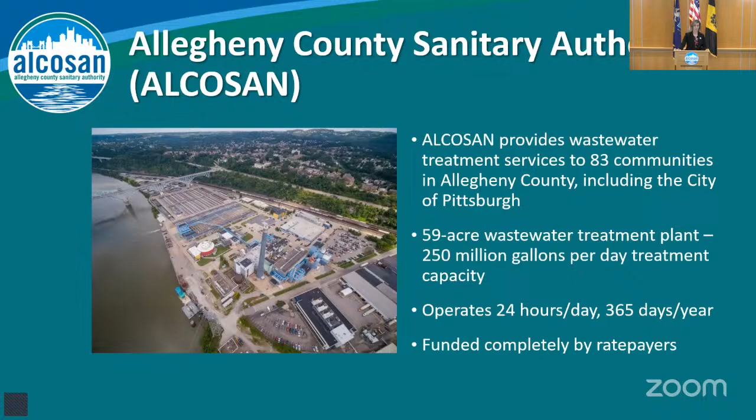This work has been at the heart of Allegheny County Sanitary Authority for more than 65 years, and we operate 365 days a year.

Tonight we will talk to you about ALCOSAN's Clean Water Plan. In front of you, you will see facts about the plan, and for the sake of time, I'm not going to dive into those facts. We have a plethora of information on our website where you will be able to find the development of this plan and its status. These are the components of the Clean Water Plan, and tonight you will hear our speakers talk about the various pillars of this plan.

But most importantly, we have 3 proposed changes to the consent decree. The first change you will hear about is an update for combined sewer overflows and sanitary sewer overflows in our service area, and that will be presented by Julia Spicher when she speaks about regionalization. The second update will be a wet weather redundant primary sedimentation tank, elimination of that, and that will be presented by Jeff Argyros when he speaks about the plant expansion. The third proposed revision will be about sampling and reporting requirements for bacteria monitoring in our rivers, and that'll be me. I will come back up and share with you that proposed change.

This meeting is an opportunity for you to be an informed participant and ask questions. Ask questions today using the chat function, or we also will have a 30-day comment period after today that you'll be able to submit a comment through our website, and we will respond to your question as well.

Before I turn this over to Tim Prevost for GROW, I want to remind everybody the reason why we're doing the Clean Water Plan. The Clean Water Plan goals are to reduce sewage overflows into our rivers and streams that directly relate to improving the quality of Allegheny County's waterways, which includes boat launches that provide access points to our rivers. These connect our communities with trails along our rivers, and also provide for public gathering and educational programs that engage the next generation and encourage waterfront development.

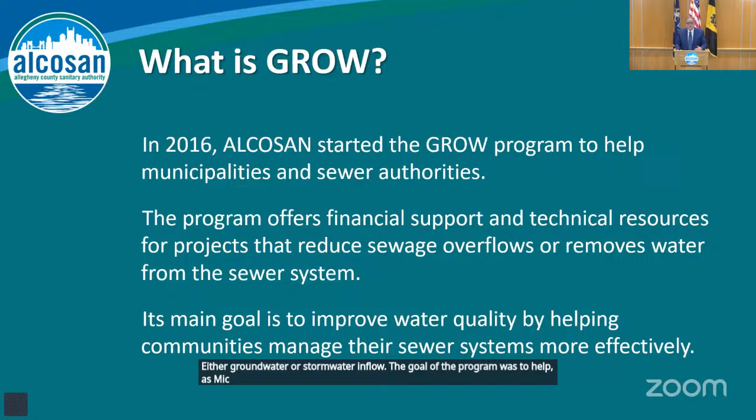I'd like to start by giving a quick overview of what the GROW program is. In 2016, ALCOSAN started the GROW program as a way to provide financial assistance to our customer municipalities to reduce the amount of water getting into the system, either groundwater or stormwater inflow. The goal of the program was to help, as Michelle pointed out, improve the water quality in our waterways. The GROW program is a grant program, and the range of funding we provide, 15% to 85%, is dependent upon how cost effective we believe the project is going to be. To understand that, each project must monitor the conditions before the project and then after the project is over for us to get an understanding of the performance that the project has.

There is a 20-year operation and maintenance obligation that the municipality takes on if they accept a GROW award.

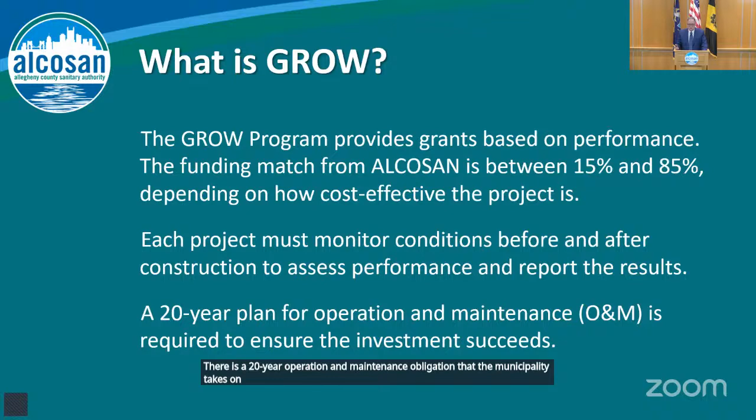Back in 2016, we released cycle 1, and in that first cycle, 42% of our customer municipalities participated in the program, and of those 42%, 24% received an award. Last September, we awarded cycle 9, and as of cycle 9, 88%, 8 of 9 municipalities have participated in the GROW program. 71% of those municipalities that have participated also received an award.

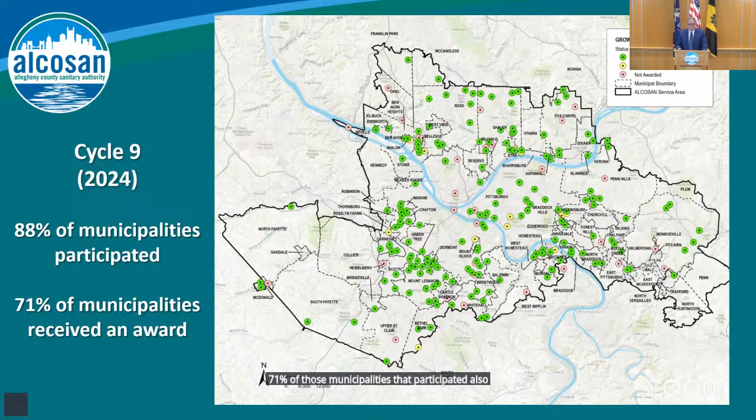As of cycle 9, ALCOSAN has awarded over $74 million to our customer municipalities for projects. Combine that with the contribution from the municipalities, we have a program that is roughly about $150 million worth of projects.

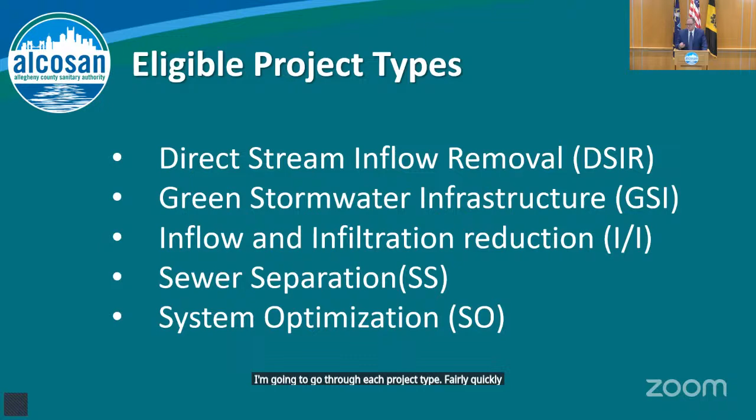Now I'm going to go through each project type fairly quickly, but I'm going to try to give a description of what the project type is and then give some statistics, because everybody loves statistics.

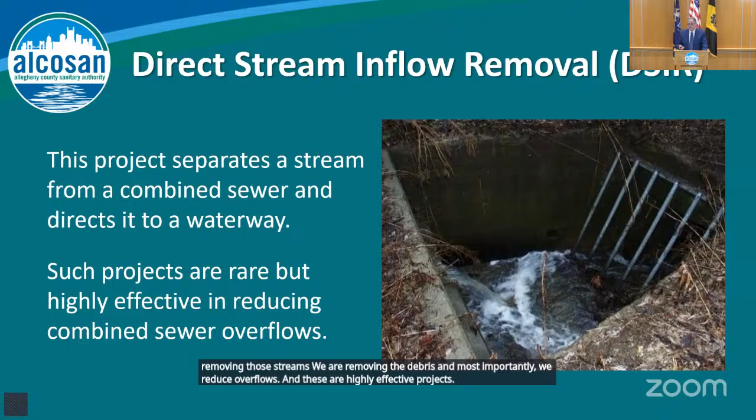This project is direct stream inflow removal. These are projects where there is a stream coming into a collection system, and when that happens, it takes up capacity, it carries debris into the sewer system, all things that we don't want. By doing a direct stream inflow project, we are removing those streams, we are removing the debris, and most importantly, we reduce overflows. And these are highly effective projects. These are rare occasions. We don't get many of these projects, but they are very effective.

We've awarded over the past 9 cycles only 3 of these projects for a little over $5 million. And when we assessed it, we thought it was about 25 million gallons of overflow reduction in a year. Post-construction monitoring, all 3 projects have been completed, and the final overflow reduction has been found to be over 40 million gallons.

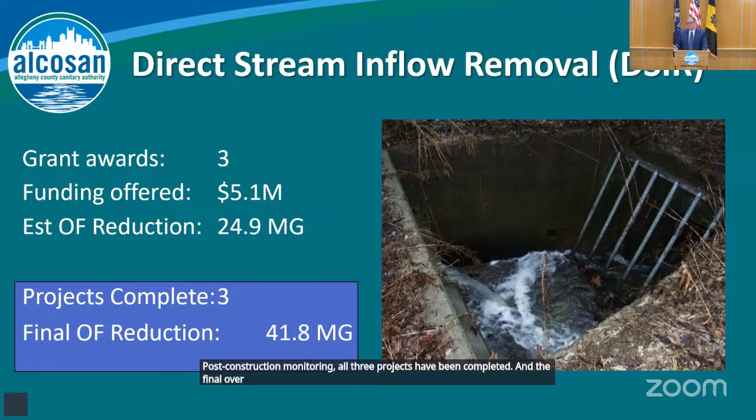Inflow infiltration removal is a project type that is very specific to one type of our sewer system, and that is separate sewer systems. ALCOSAN has 2/3 of our municipalities on separate sewer systems, so this is a very common technology. What these do is they get infiltration out of the pipes and tighten them up so we're not getting groundwater into our system. These projects require a lot of investigation that our municipalities have been doing for quite some time, so they are very confident where these projects should go.

118 projects have been awarded, $25.8 million in funding, and when we ran through these, we thought 54 million gallons of overflow reduction for those 118. Based on the monitoring of the 63 projects that have been finished, we're estimating over 60 million gallons of overflow reduction in a year.

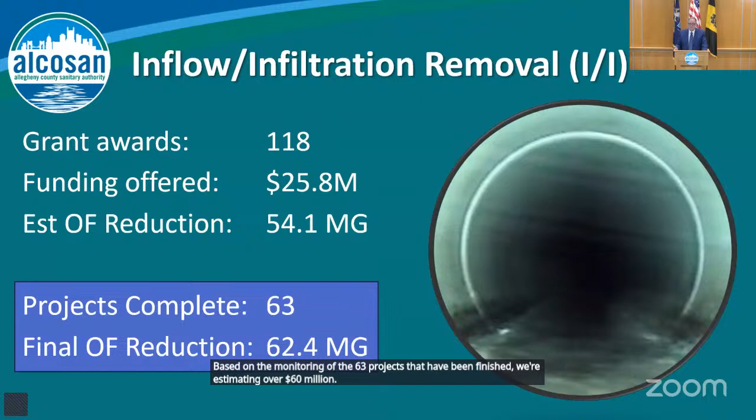Green infrastructure projects are ways to try to mimic nature and semi-natural systems to manage stormwater runoff. By managing the stormwater runoff, we're not allowing that water to get into a combined sewer system very quickly. A lot of the green infrastructure designs that were funded by GROW have been recognized nationally and regionally and have won awards.

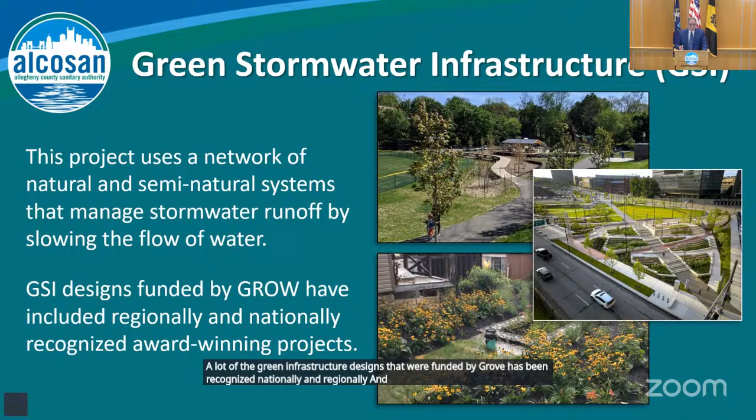We have 33 awards over the past 9 cycles, $18 million in funding, and the estimated overflow reduction of those 33 projects was about 43 million gallons. We've completed 16 of these projects, and 8.8 million gallons of overflow reduction were from those 16. I do know that there's many more projects that are coming that are almost going to get the final report, so we'll have a better update for you next year.

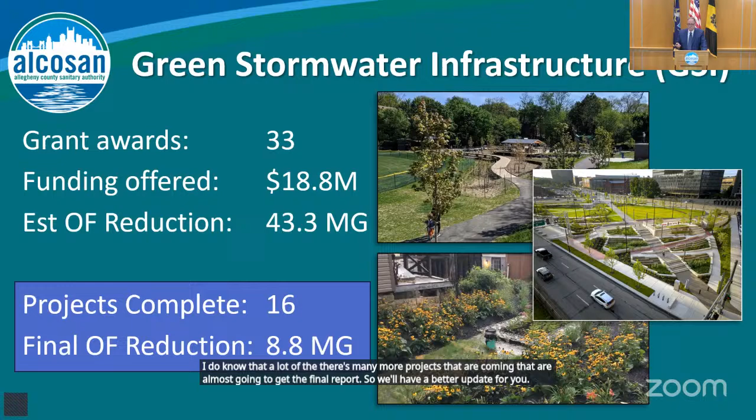Sewer separation projects are when you have a combined system and you split them up into a storm sewer and a sanitary sewer. These are very effective projects, but they're unique to combined sewer systems. These projects have an opportunity to significantly reduce combined sewer overflows.

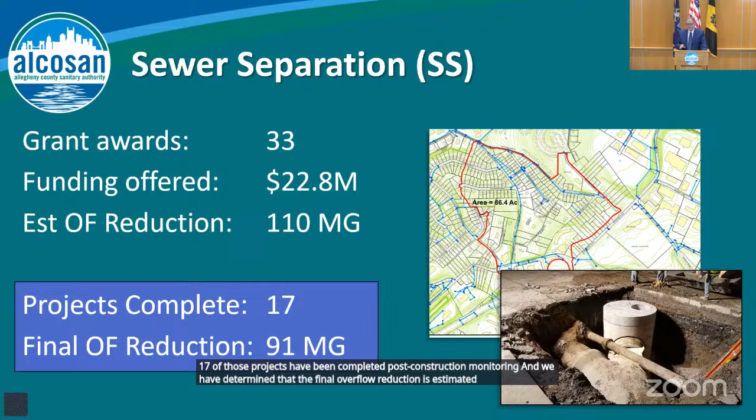We've awarded 33 projects for almost $23 million. When we estimated these projects, it was 110 million gallons. 17 of those projects have been completed post-construction monitoring, and we have determined that the final overflow reduction is estimated to be 91 million gallons. So these are very effective projects.

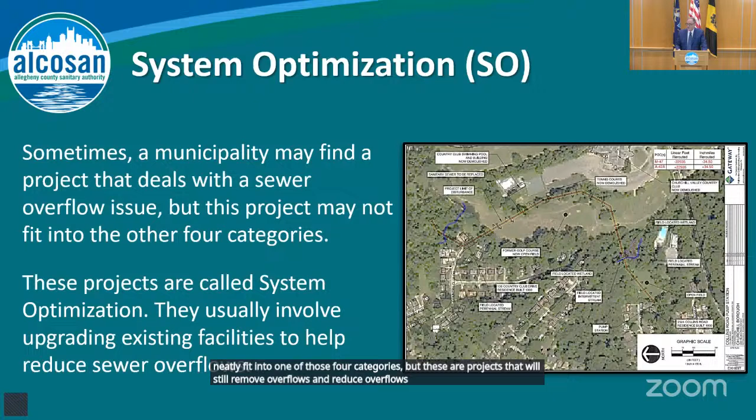And finally, system optimization. Sometimes there are projects that don't neatly fit into one of those four categories, but these are projects that will still remove and reduce overflows. So they are a category in GROW, but they're also very rare. We've awarded 3 of the projects for about $1.7 million, a little over 4 million gallons in estimated overflow reductions. 2 of those projects are complete, and we're estimating about 2.8 million gallons of overflow reduction in the year.

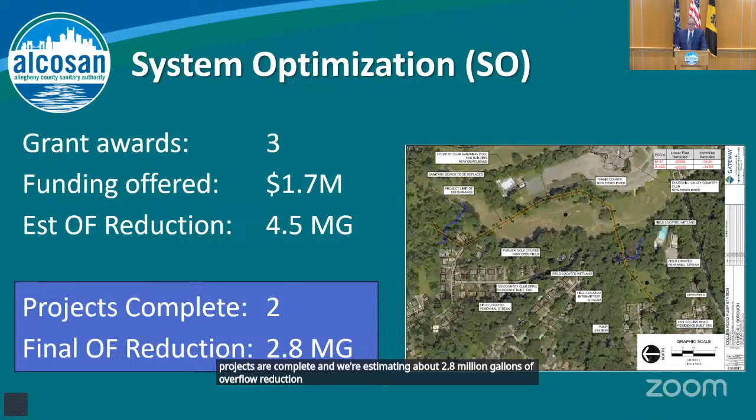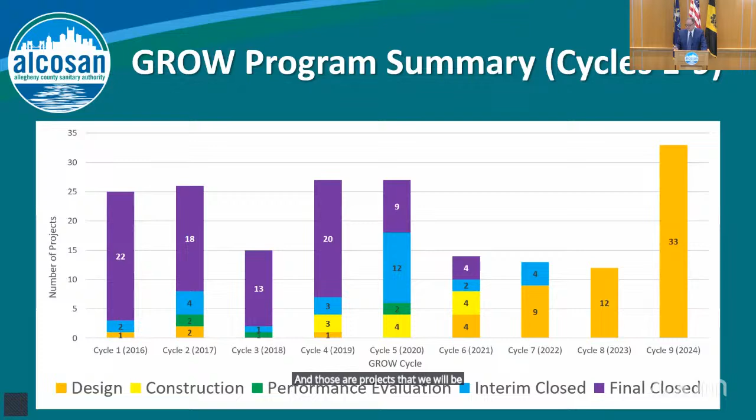This chart shows the status of the projects from cycles 1 through 9. You'll see in cycles 1 through 5, a lot of projects are final and closed. There are many projects that are finished but have maybe a final report to submit or a final payment to get—those are interim closed. On the other side, there are a lot of projects in cycle 9, 8, and 7 that are still under design, and those are projects we expect to be going into construction within a year or two.

As of today, 101 projects of the 190 are completed with a submitted final report.

After a project is done, ALCOSAN will evaluate that final report to assess how effective that project was. We compare those results from beginning to end, and we determine whether a project has been overperforming, is within what we expected, or is underperforming. Most of the projects, as this chart shows, are overperforming or meeting our expectations. Overall, the results have exceeded expectations.

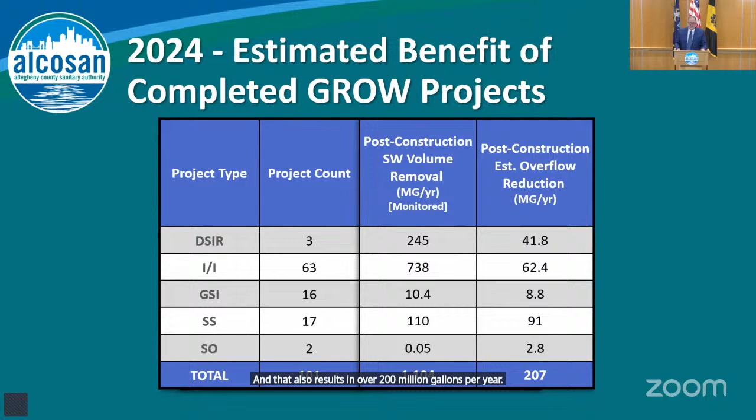And this is the results. As of 2024, for these 101 projects, we've removed over 1 billion gallons—1.1 billion gallons—of water from the system, which also results in over 200 million gallons per year of overflow reduction. When you compare that to what we thought we were going to do, 630 million gallons of water removed, or 108 million gallons of overflow removed, we're definitely seeing that a lot of these projects are exceeding our expectations.

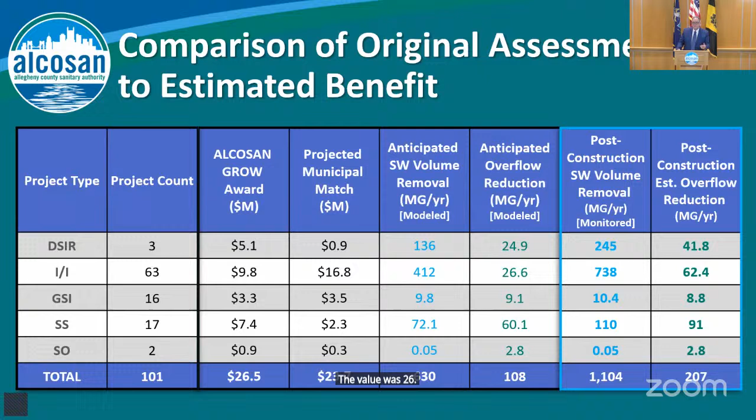And you also see that of the projects finished, the value was 26.5 million, and the municipal match was 23.7 million.

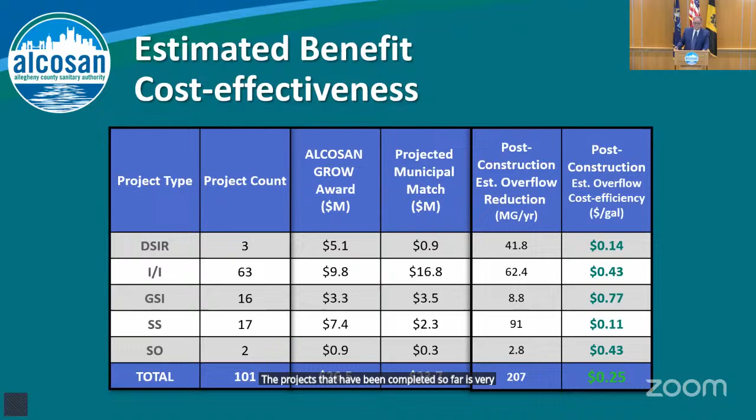And how cost effective are these? Stream inflow and sewer separation are definitely very cost effective projects, but all in all, when you put them together, the projects completed so far are very cost effective. We're estimating about 25 cents per gallon.

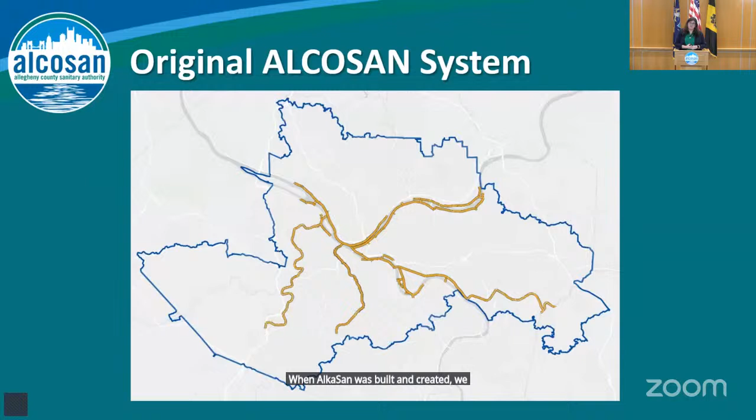So the municipalities will still continue to own their system—it's just that critical piece that's eligible for transfer. When ALCOSAN was built and created, we owned the Woods Run treatment plant, and these yellow lines you've seen on screen are our shallow cut and deep tunnel interceptors, large diameter sewers underground. They hug the rivers and extend into Chartiers Creek, Sawmill Run, and Turtle Creek.

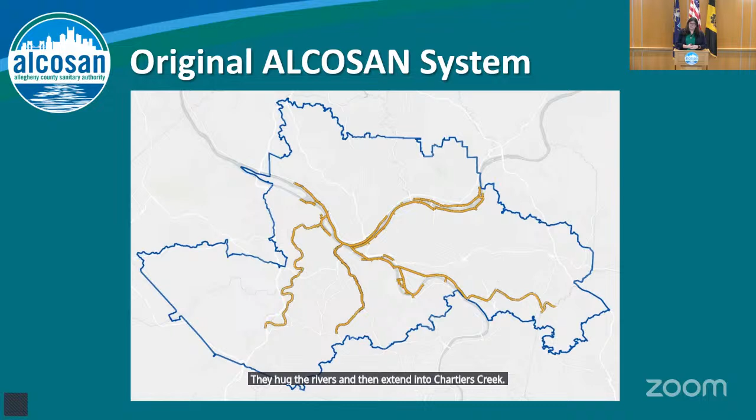Working with key stakeholders and our municipal partners, we developed criteria for what would be considered eligible for transfer, and we landed on any sewer that is 10 inches in diameter or larger and serves more than one municipality. When you apply that criteria to our system, that resulted in 265 miles being eligible to participate in the program.

Along those sewers are over 6,000 manholes and over 100 regulators, which are locations in the system where flow can either continue on for treatment or relieve itself and overflow into the water bodies during wet weather to protect public health. At those regulator structures, there are 68 combined sewer overflows and 40 sanitary sewer overflows currently owned by the municipalities and their responsibility to abate or control. There are also 4 pump station facilities and 4 equalization basins.

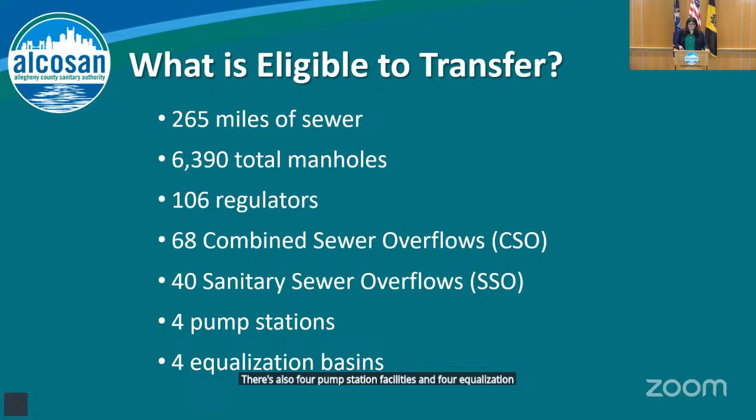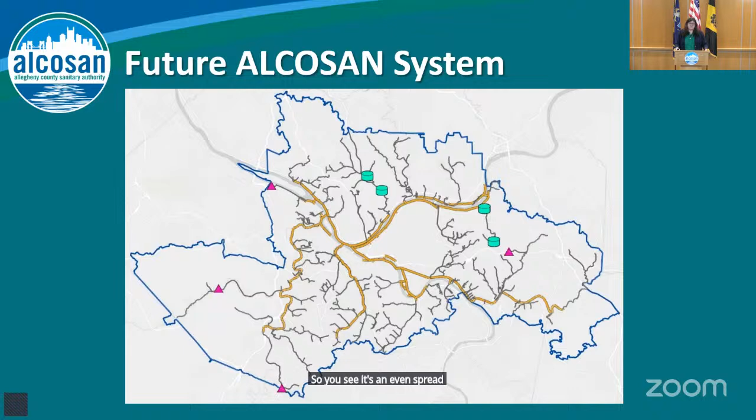With the completion of the program, this is what the future ALCOSAN system would look like. All of the gray lines are the trunk sewers eligible to transfer. The teal cylinders are equalization facilities, and the pink triangles are the pump stations. You see it's an even spread across the entire service area, serving 66 of our 83 municipalities.

In 2023, the program had the critical milestone of completing its first transfer. At that annual meeting, we reported that 12 miles had completed the process. In 2024, we doubled that, reaching 25 miles transferred. Today, through collaboration with our partners, we have 51 miles transferred. In total, 139 commitments have been made for mileage eligible to come over, and that's what the team is working on now to complete.

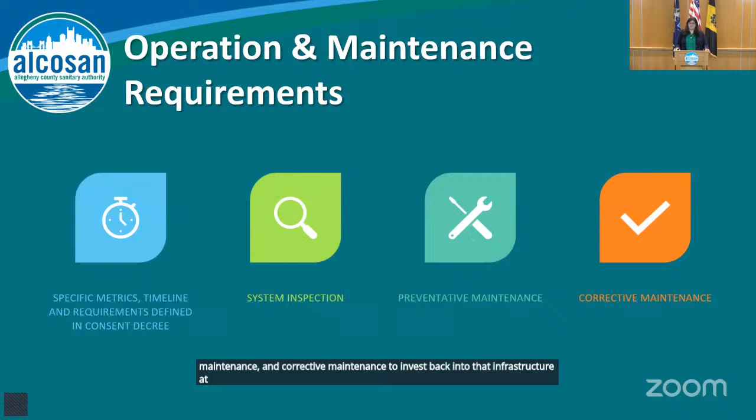Immediately upon transfer, we begin inspecting the system. We work closely with our partners at Three Rivers Wet Weather on multi-municipal collaborations, sharing resources such as hydraulic modeling and flow monitoring services, and developing project alternatives that help both the municipality and ALCOSAN complete compliance requirements and achieve the water quality the region is striving to accomplish.

Once system inspection is completed, we begin preventative maintenance. Our in-house crews have done an excellent job stepping up to this challenge, cleaning the system, including root controls, and becoming familiar with the municipal systems that have transferred. We also plan for corrective maintenance, which addresses locations where we need to make full improvements to sewers where restoring structural integrity is no longer an option and new capital investments are needed.

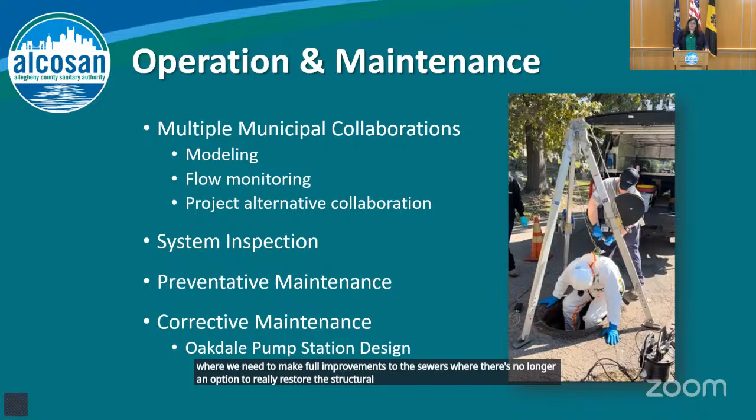As Michelle mentioned, we're addressing 3 of the changes we're proposing for the consent decree. The first is a list of the CSOs permitted to ALCOSAN. We've been able to close 2 outfall structures along the Allegheny, which we call A55 and A63. We've also transferred 7 CSOs from the municipalities to ALCOSAN.

On the sanitary sewer overflow front, we were able to close 1 structure in Turtle Creek, T33, and through the GROW program and our partnership with Wilkins Township on a sewer separation, we closed the overflow TR03 into Thompson Run. 6 SSOs have been transferred to ALCOSAN under the regionalization program.

So our first proposed revision is to update the list of combined sewer outfalls and sanitary sewer outfalls to reflect these changes, moving this infrastructure from the municipalities' permitting requirements to fall under the umbrella of our consent decree.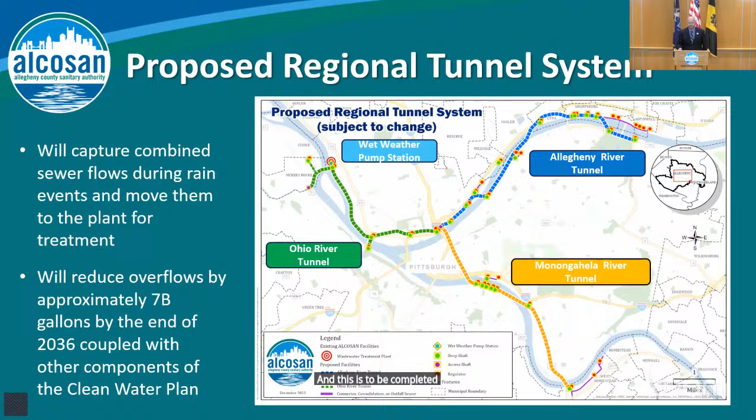This zoomed in view shows a little more detail of the current alignment for the Ohio River Tunnel. We will begin mining the Ohio River Tunnel from the AS1 shaft shown on the right-hand side of the slide, and progress down towards the wastewater treatment plant, ending at the O27 shaft. This will be an 18-foot finished diameter for the main tunnel. From O27 to the proposed wet weather pump station, there's an 8-foot dewatering tunnel, which will carry flow to that destination.

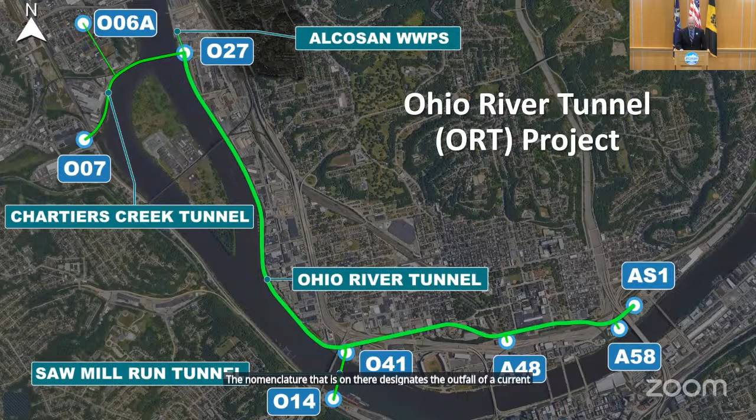When we bid the Ohio River Tunnel, it'll be bid as one main package. That means there'll be one team that will perform all the work required for this project. Likely they will not do it all themselves; they'll have to subcontract, and there still leaves plenty of opportunity for work across the region.

Included in this package, there's approximately 4.9 miles of tunnel, 8 shafts, of which 6 will be drop shafts and 2 will be access shafts, and 2 control buildings for active control gates along the tunnel.

The image on the left gives you an idea of the underground facilities that will be constructed, showing how flow goes through regulators into a shaft, drops the flow down to the tunnel elevation, and then makes its way towards the plant. The key takeaway here is that with tunnel construction, disruption at the surface is very minimal compared to standard construction procedures.

The image on the right gives you an idea of really one of the only above ground structures that will be left once construction is completed. This is represented here by the building, the active control gate building, which we have in this case at the A58 site, as well as some vent piping for the tunnel system.

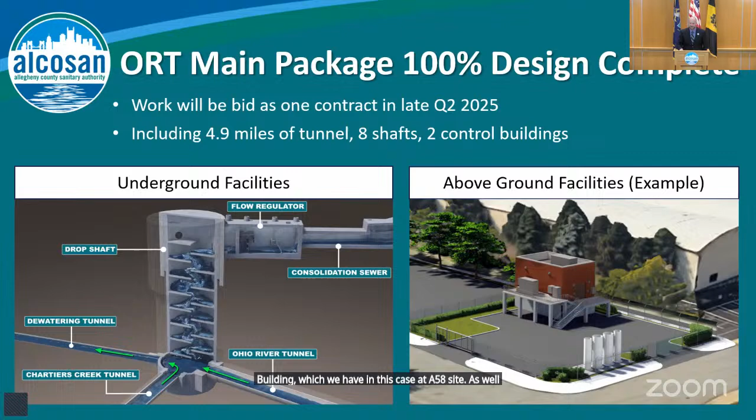As we prepare to bid the Ohio River Tunnel project, we've taken advantage of the time we have to get out early works demolition packages. What we do with these packages and projects is take down buildings and other structures at sites that ALCOSAN has already acquired for key sites along the Ohio River Tunnel.

The 2 examples shown here from the first contract are the O14 and O41 sites, both located by the West End Bridge. You can see the before and after showing how the site stands today.

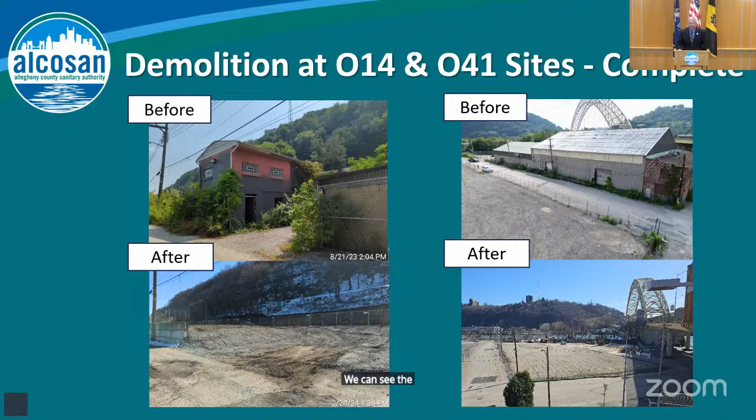The second early works demolition package that we bid, currently out now, is the AS1 site. As mentioned, this is the site from where we'll launch the TBM to construct the main tunnel. This is also the site from where we will launch the Allegheny River Tunnel. So this is really a long-term main site for the tunnel program.

The area outlined in red encompasses all of the area that will be part of the demolition package, with the exception of the Turner Hall building shown there. That building will be maintained and protected during the construction period, and will then be turned back over, to be determined in the future.

The purple circle represents the shaft, and the green lines represent the tunnel at this location.

The image at the lower left-hand corner represents a historic ladle from the steelmaking process, which was recently moved from the site so that we could begin work. This ladle has been transported to a site by the Heinz History Center, where it is now on display for people to witness part of Pittsburgh's historic steelmaking history.

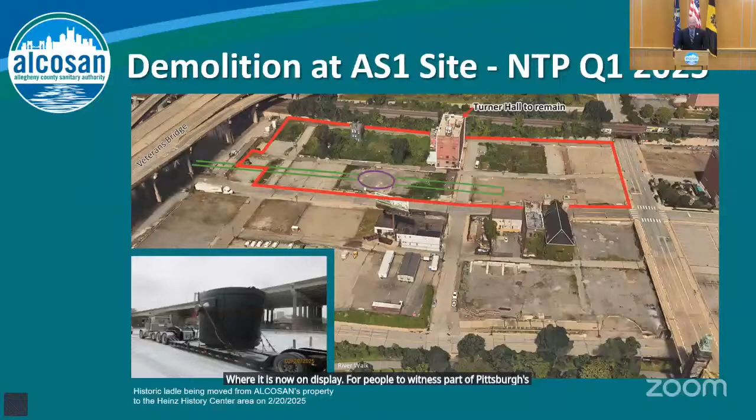This is a very tight site in a congested neighborhood, so there'll be plenty of work that has to be done here and things that will be done to accommodate that work.

As an update on the Allegheny River Tunnel, we have just brought the final design consultant on board at the end of 2024. That process is underway now as we're working through onboarding and dissemination of data that we have for the designer.

Another portion of the Allegheny River Tunnel that we previously broke out as a separate project, we call the Near Surface Facilities Package 6. This is the area outlined in red here, located in the riverfront communities of Sharpsburg, Aspinwall, and O'Hara. The idea was that we could get ahead of redevelopment at that site and get our buried infrastructure in the ground ahead, in conjunction with the developer.

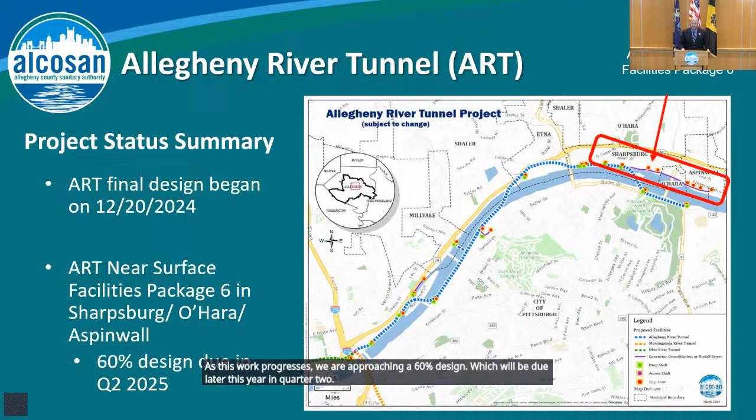With that, I'll pass it over to Jeff Argyros to give an update on the wet weather plant expansion.

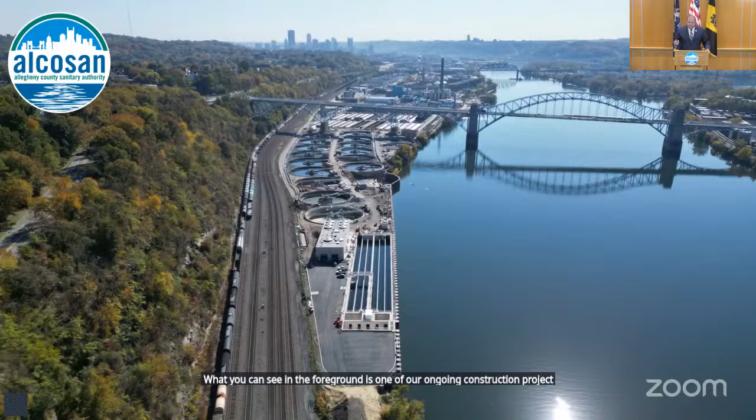To start out our wet weather plant expansion update today, I like sharing an updated drone image from this vantage point of our plant. This is the northern tip of our plant. What you can see in the foreground is one of our ongoing construction project sites. In the middle, you can see the McKees Rocks Bridge bisecting our plant. And then off in the distance, you can see the city of Pittsburgh.

One thing to highlight this year with the drone photo that I'm starting off with is in that foreground, you can really see that project and the finishing touches being put on. In fact, you can see the fresh asphalt that we put down right before the cold weather came in this year. So I'll provide an update on that in a little bit.

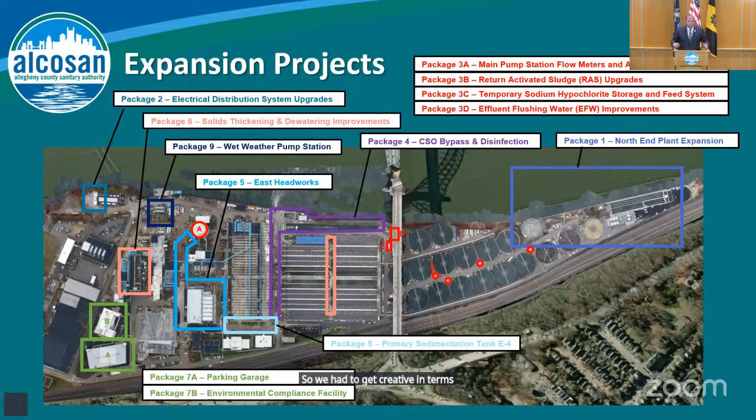We are getting very close to having $400 million committed by ALCOSAN to these plant expansion construction projects. We're just $2 million shy of that. So that solids thickening and dewatering improvements pushed us that much closer to the $400 million mark. And of that $400 million committed, we have spent about $290 million to date.

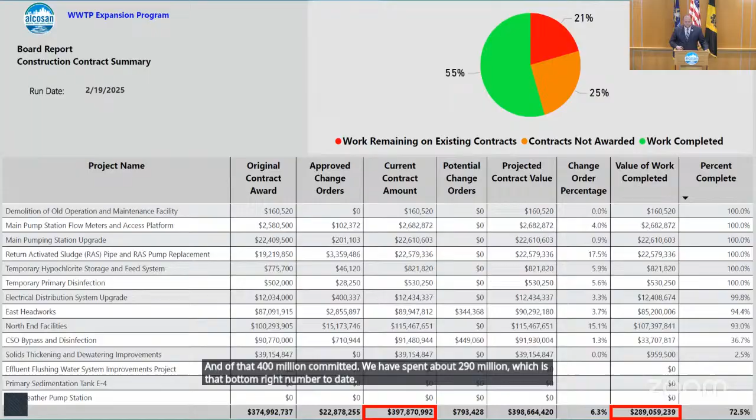So just about 200 feet away, that is where our wet weather pump station is going to go. And just like our existing main pump station conveys flows from our existing interceptors to the treatment plant, this wet weather pump station is going to convey the flows from the regional tunnel system that Shawn just spoke about to the treatment plant for treatment.

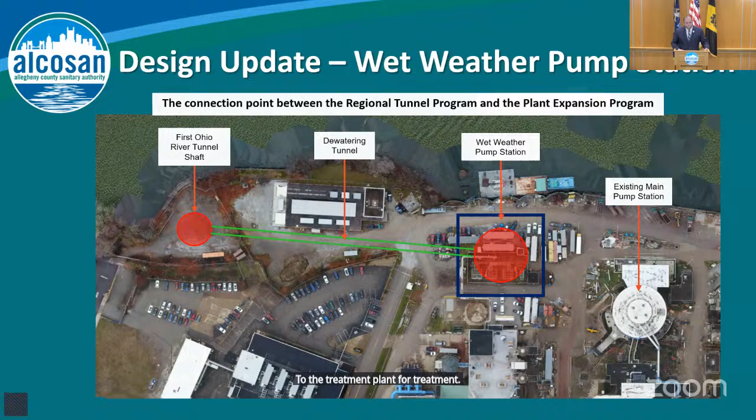So what will this wet weather pump station look like? If you have been on that tour at open house and seen what I described on the previous slide at the main pump station, you've seen a lot of the concepts that you'll likely see in this future wet weather pump station. The wet weather pump station layout is going to be very similar to the existing ALCOSAN main pump station, based on the great historical performance of our existing main pump station.

So when I say that, that's this wet well, dry well concept. To describe what that really looks like, you have to picture a donut. The hole inside the donut, that's the wet well, where all the sewage collects. And then the meat of the donut, that's the dry well component, where all the mechanical and electrical equipment stay so that they're not interacting with the same atmosphere that the sewage is.

What are the dimensions of this wet weather pump station? It's going to be extremely large, 120 feet in diameter and about 180 feet in depth, which will be even deeper than our existing main pump station right across the street. And then finally, the schedule update for this project: we anticipate getting the 100% design documents next week, and we have plans to bid this project in early Q2 of 2025, very soon.

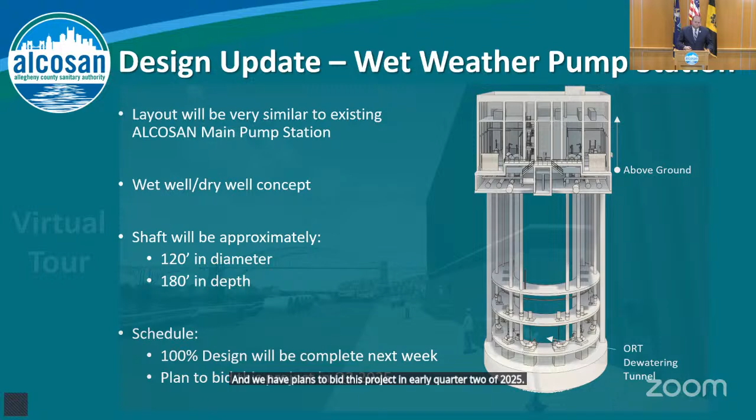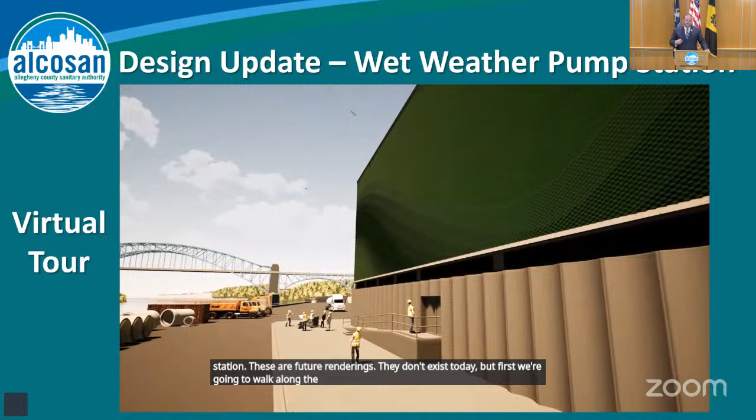So next up, we're going to take a virtual tour of the wet weather pump station. These are future renderings; they don't exist today, but first we're going to walk along the exterior facade, walking along the Ohio River side. Two things to highlight here: the textured brick facade up top, and then on the bottom, some concave concrete panels along the entire base of the facility.

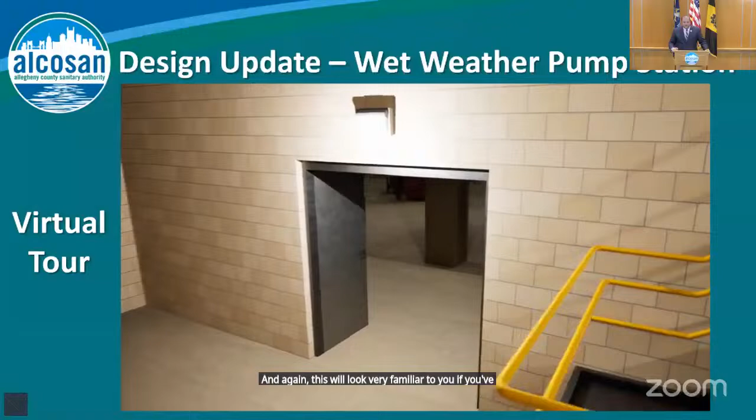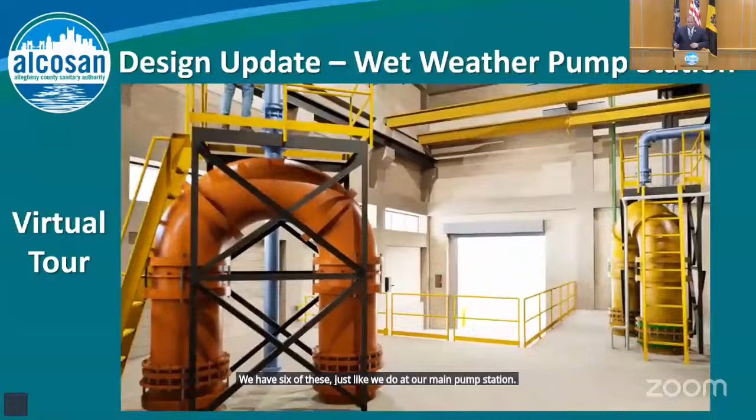And then as our virtual tour continues, we're going to enter the building from the north. Again, this will look very familiar if you've been on our ALCOSAN open house tour. We're going to enter at grade, and you're seeing our siphon piping. We have six of these, just like we do at our main pump station. We are going to see three of them before entering the elevator right behind us.

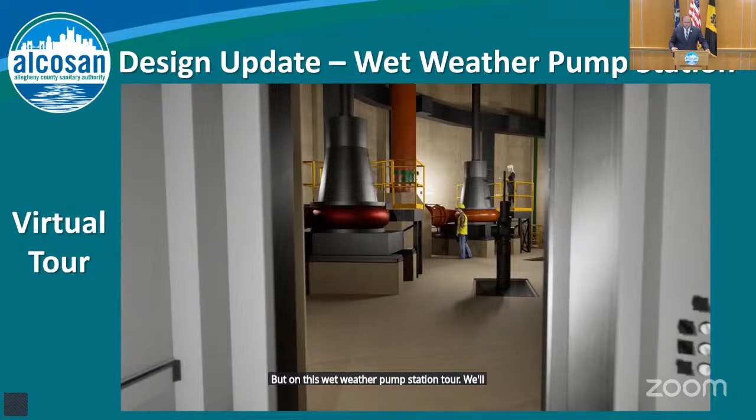This elevator is going to take us down that 180-foot shaft to go look at the pumps. This is a stop that you're not going to get on the ALCOSAN open house tour. But on this wet weather pump station tour, we'll exit the elevator and get to see 180 feet deep, and we'll walk by our 6 pumps down here.

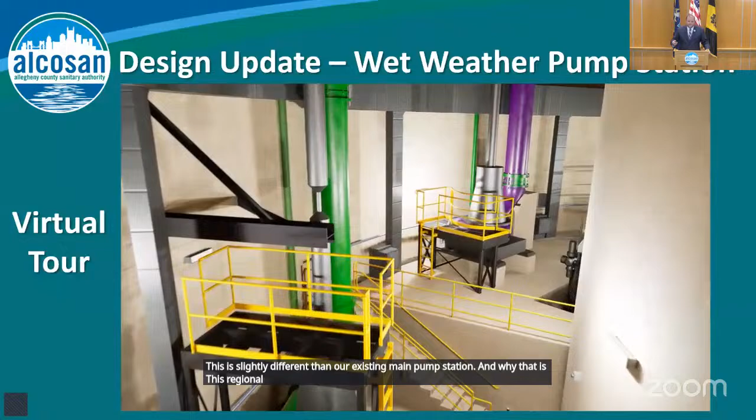First, we'll walk by 2 pumps at the same elevation, and then we'll walk over to 2 that are at a deeper elevation. This is slightly different than our existing main pump station, and that's because this regional tunnel system will really be used during wet weather events, so this wet well will have to operate at many different elevations.

When the wet well is at a very low elevation, these 2 lower pumps are going to be the ones in service. You hear a lot of people talk about the lowest point in Allegheny County. Well, I'd like to be the first to introduce you to the new lowest point in Allegheny County.

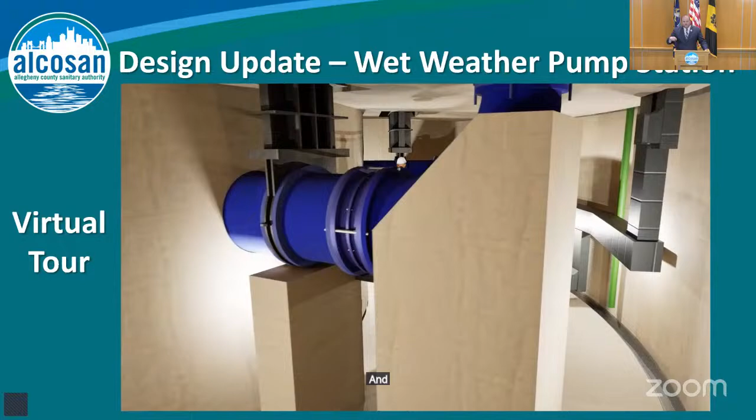We're not at the pumps, we're actually below the pumps now. We're going to walk around this entire base, and what you're seeing is the suction piping for our 6 pumps.

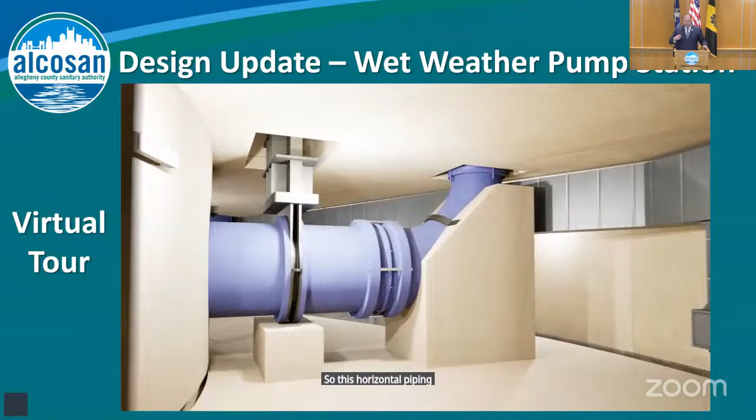So this horizontal piping, what's happening here? Right above us are the pumps, but the pumps are pulling from that wet well, which is right on the other side of the wall to the left side of the screen.

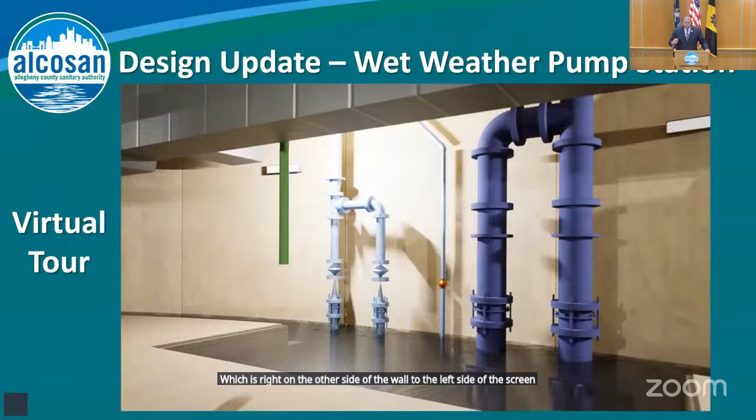What we're looking at here is a sump pump in case water gets down here, or in case of a flood emergency. We have some submersible pumps located at this location.

And then we'll walk into the final 2 suction piping, and we'll exit through the elevator.

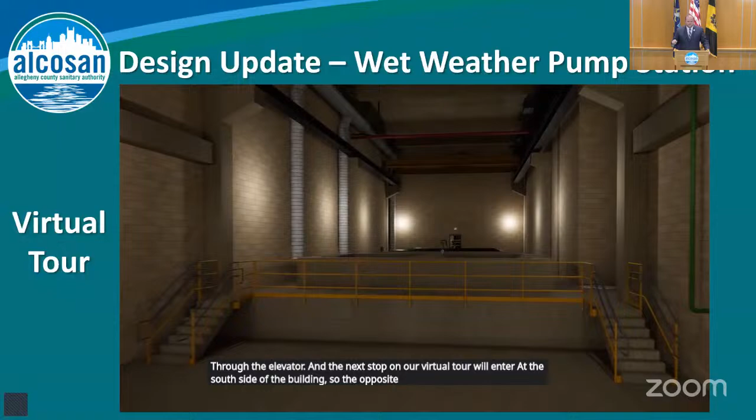The next stop on our virtual tour, we'll enter at the south side of the building, opposite from where we just went in, and we'll stay at grade for this stop. Where we're looking here is down that 180-foot shaft, down into the sewage. This is a future access point for future installation of mechanical equipment that we are not putting in day one.

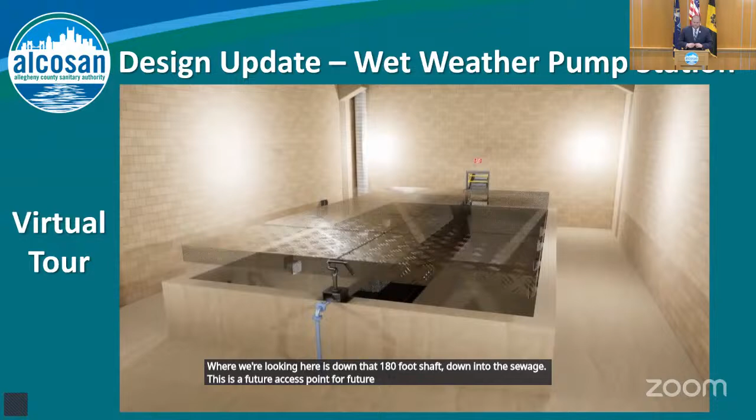But last, this is the image I want to leave you with. This is the view down into our wet well. If you've been on that ALCOSAN open house tour, you've actually seen this view at our existing main pump station. This is the center of that donut. This is the wet well.

The thing is, when you look down in our main pump station, all you can see is sewage. This is what you're looking at underneath the sewage. These are the 6 suction piping that we just walked by, down 180 feet. So that's the final update for the wet weather pump station.

We'll move on to a few construction updates, starting at that north end plant expansion. This was the image that I started off with. This is the northern tip of our plant. You can see the triangular shape at the northern tip.

This is the first real flagship plant expansion project that's been under construction for just about 5 years, since August 2020. There are 3 things being shown on this slide: the new disinfection tank, the new chemical building, and the new outfall. These 3 systems were activated on January 16th, 2025.

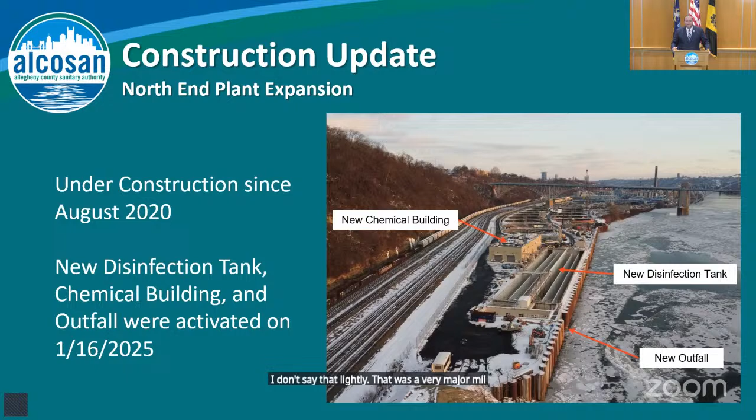I don't say that lightly. That was a very major milestone for ALCOSAN, and that was the first day that we activated this new outfall, which leads me to the next slide.

These photos were taken above the Ohio River moments before our old outfall was deactivated on the left, and then moments after our new outfall was activated further downstream the Ohio River, which is where we just saw on the last slide.

This was a major milestone for the entire plant expansion. This is something that's been in the works for 4.5 years. In fact, even longer, but the construction of the north end plant expansion took 4.5 years.

It was also a sad day because that old outfall had been in operation since ALCOSAN's treatment plant went into operation in 1959. So we retired the legendary old outfall and we activated our new outfall, highlighted in the blue star.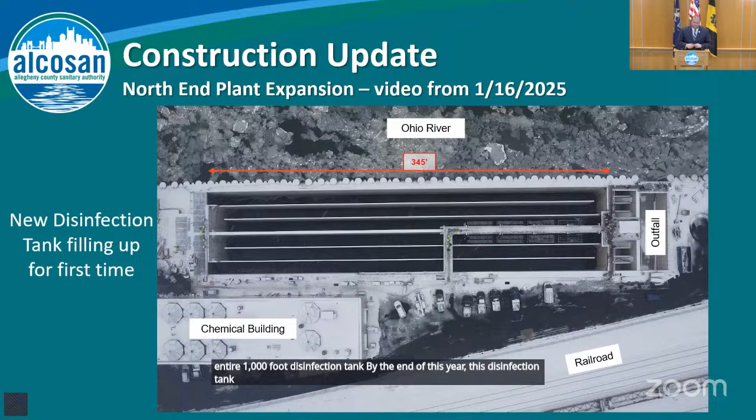The north end plant expansion, what remains? Now that we've activated that disinfection tank, that chemical building, and that outfall, the 2 things that remain are the 2 new final settling tanks, EFS9 and WFS9, which you can see in the photos on the right. EFS9, as you can tell, is a little bit further along. WFS9, that's where the majority of the remainder of work will be focused.

That photo on the bottom left was taken down at grade, and it's really to highlight how much rebar goes into a large reinforced concrete structure like the final settling tank here. You may not be able to tell from this image, but this is a 140-foot diameter clarifier. We have 16 today, and with the addition of EFS9 and WFS9, that will increase our total to 18 final settling tanks. As you can imagine, 18 settling tanks at 140 feet in diameter, that takes up quite a bit of real estate.

Once these 2 new final settling tanks are activated, that is when we will be able to reach that 295 million gallons per day capacity.

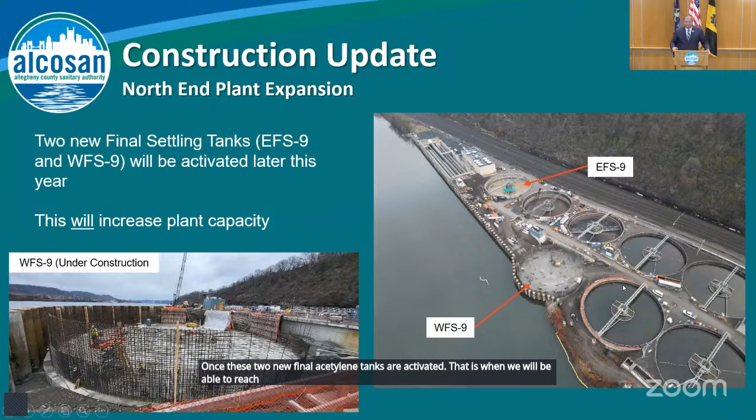Moving further south into our plant, we'll talk about our East Headworks project, another flagship project that's been under construction for just about 4 years, since June of 2021. If you've been to ALCOSAN's open house, you've likely seen this as the backdrop.

This photo was taken just about a month ago, and as you can tell, the exterior of the building is just about done. It looks like a completed building. As of today, we haven't quite set flow through it yet, but we do anticipate doing that within the next couple months, which will be another major milestone for the plant expansion and ALCOSAN as a whole.

The final construction update I'll give today is our CSO bypass and disinfection project. This project's been under construction since October of 2022. Where has most of the work been located on this project?

Starting at the top right of this image, the upsized flow regulating chambers. It's a little difficult to see here, but the next slide will show an overhead view of that location.

The other area that a lot of the work has been focused on is this new chemical building. Just like at the north end, we have to build a new chemical building in this location. So the majority of the exterior facade has been constructed.

And then finally, the other item being called out on this slide is the reconfigured bypass disinfection tank. What does that mean? This ties back to that January 16th date I was talking about under the north end. Once we activated our new outfall and we deactivated the outfall that you're seeing in this photo, our old outfall, this disinfection tank was replaced by the north end disinfection tank.

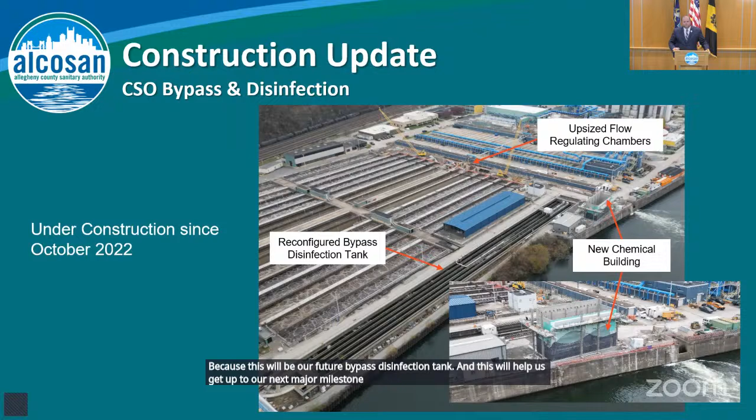So as promised, here's the overhead view of the upsized flow regulating chambers. I mentioned this at last year's annual public meeting. This is a very difficult area for construction. What you're looking at is primary treatment towards the bottom of your slide, and then secondary treatment towards the top of your slide. Primary was built about 1959, and then secondary treatment was added in about 1970.

And this area in between the two has really remained untouched for the most part. It's an area that doesn't get dug up very often, but what we're seeing here are 2 of the 8 connections between primary and secondary treatment. These are usually buried, that's why they're not usually visible. This is a roadway. But for this project, we had to dig up these 8 flow regulating chambers, and we had to replace them with larger piping.

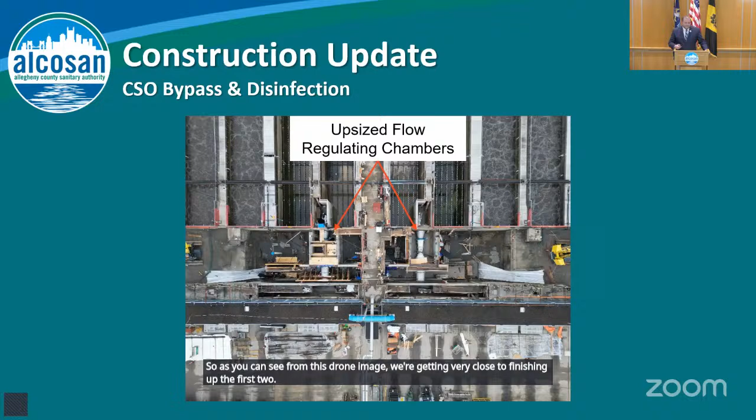That allowed us to reduce the amount of hydraulic loss in this location of the plant, and this will allow us to get up to that 480 million gallon per day number. So as you can see from this drone image, we're getting very close to finishing up the first 2. We still have 6 to remain, and those will be coming in the years ahead.

So that's it for the project-specific updates. Where I'll wrap up is a proposed modification to the consent decree, and that's the elimination of a redundant primary sedimentation tank during extreme weather events.

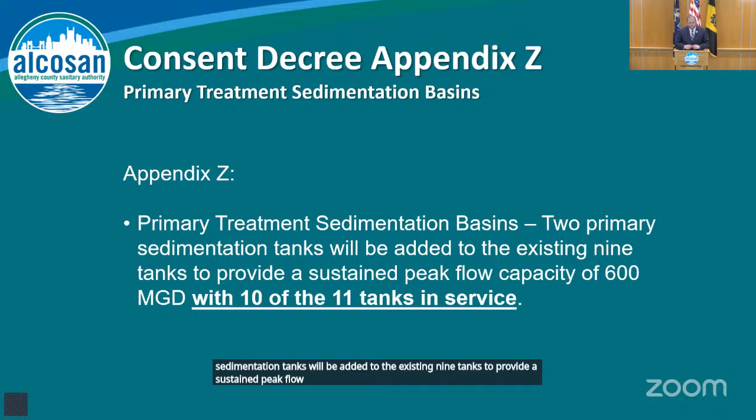To start out, I'm putting on the screen the consent decree language in Appendix Z for these primary treatment sedimentation basins that are the source of the modification. The language reads: primary treatment sedimentation basins. 2 primary sedimentation tanks will be added to the existing 9 tanks to provide a sustained peak flow capacity of 600 million gallons per day, with 10 of the 11 tanks in service.

As ALCOSAN has done on all of our plant expansion projects, and many of our peer facilities do across the country, we had a value engineering phase early in the design period of this primary sedimentation tank project. One of the major recommendations that came out of that VE phase was to eliminate one of the 2 new primary sedimentation tanks, because a redundant tank during extreme weather events is uncommon at our peer authorities.

And we did. Next up, what do I mean when I say extreme weather events? I'm talking about the plant experiencing an event where we would be operating at 540 million gallons per day or above. Keep in mind, today we currently treat up to 250 million gallons per day, and by the end of this year we will be treating up to 295 million gallons per day.

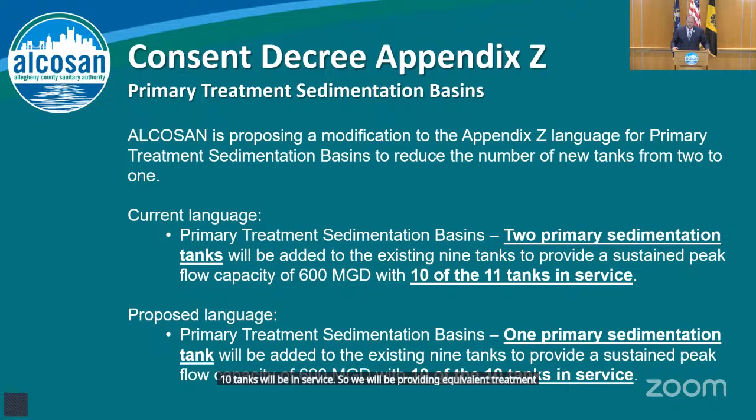So to summarize the proposed revision: we propose to eliminate a redundant primary treatment sedimentation tank during extreme weather events that were originally planned as part of the Woods Run treatment plant upgrade.

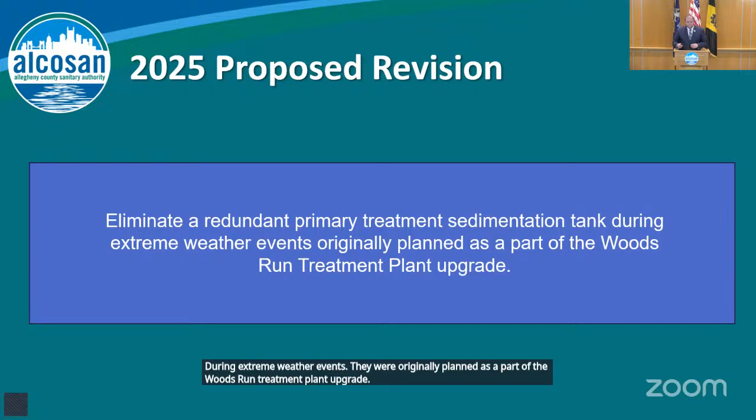And with that, I'm going to hand it back to Michelle Buys to talk about the next revision.

Okay, thank you, Jeff. Okay, so we heard a lot about a lot of big things. We heard Jeff talk about big tanks, big numbers, big flow scenarios. Shawn talked about deep tunnels and our conveyance system, how we're upgrading it to carry a lot more flow through the region. Of course, Julia and Tim had enhancements that we are providing in our community. But what I'm going to introduce you to now is something that's microscopic.

It's small. We're going to be talking about bacteria monitoring and water quality. Currently, our consent decree requires us to measure for bacteria in the rivers and streams at various stages of the Clean Water Plan to make sure that the goals of the Clean Water Plan are achieved. Bacteria monitoring in the 2008 original consent decree just had fecal coliform as the bacteria parameter for us to monitor. Fecal coliform and E. coli are the most common bacteria indicators for sewage in rivers and streams when sewage is overflowing.

The ALCOSAN consent decree only required fecal coliform. So due to some logistics about collecting fecal coliform now in 2025, and a scientific shift towards monitoring for E. coli as the primary indicator for sewage, we are asking the agencies to add E. coli to our consent decree for the water quality monitoring program.

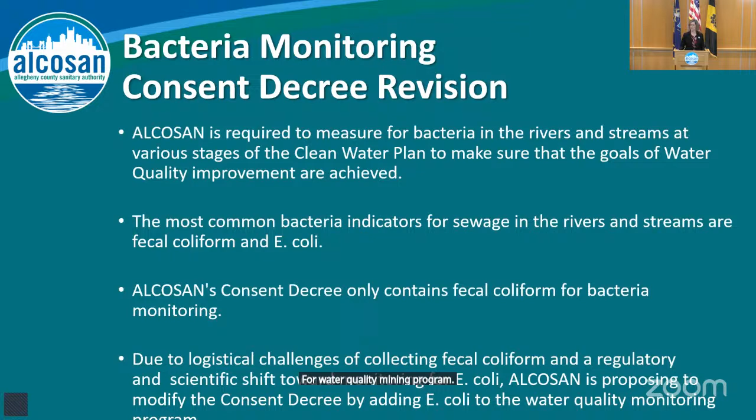So although this change is very minor, we are adding a request to add a pollutant. It is very important to our program. Water quality, as we mentioned in the beginning of this presentation, is the guts of the Clean Water Plan.

What we're seeing, all these wet weather improvements are really for wet weather, and that's when our system overflows, as shown in this diagram. Dry weather, we don't have this problem. We have enough capacity for our existing system to treat and convey our service area. But during rainstorms and snow melts, they overwhelm the system, and as it currently is today, these overflows occur.

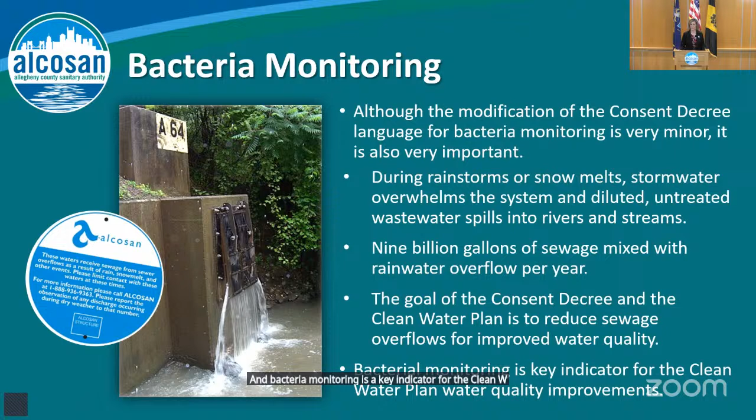So the goal of the consent decree and the Clean Water Plan is to reduce sewage overflows and improve water quality. Bacteria monitoring is a key indicator for the Clean Water Plan water quality improvements. So this third revision that we're requesting today to the agencies is to update our water quality bacteria sampling and reporting requirements to reflect the scientific shift towards monitoring for E. coli. The reason is due to the revised water quality standards and the availability of local laboratories accredited to perform EPA-approved fecal coliform methods.

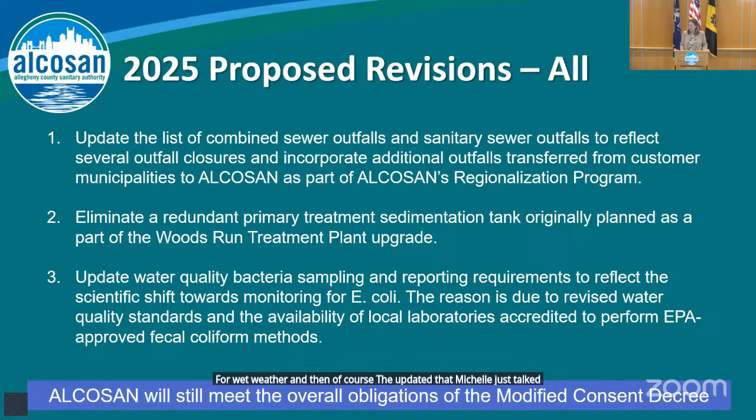So here's what's next. There will be a 30-day public comment period, starting today or tomorrow — let's call it March 28th. You have a couple of options for submitting public comment. There's an email address where you can say you're submitting public comment with respect to the 2025 revisions request. Or if you feel more comfortable, you can mail the comment to ALCOSAN, to my attention, and we'll make sure that we read it, review it, and respond.

ALCOSAN met with the regulatory agencies and discussed the same 3 revisions that we just discussed with you tonight. We will then review the public comments at the end of April and see what has been submitted by the public. At that point, we'll take the feedback and put together a submittal document that will be submitted to the agencies for their review and approval. The agencies get 6 months to review it, ask any additional questions or backup information, and then render their decision at that point.

So that's it for the revisions portion of tonight's program. I did want to mention our open house. Jeff talked about it, it's a wonderful event. We go into greater detail on all 4 pillars of the Clean Water Plan, in addition to a lot of other work that ALCOSAN does day in and day out. September 13th, please mark your calendars. Rain or shine, we'll be here to showcase our work that we do for the region.

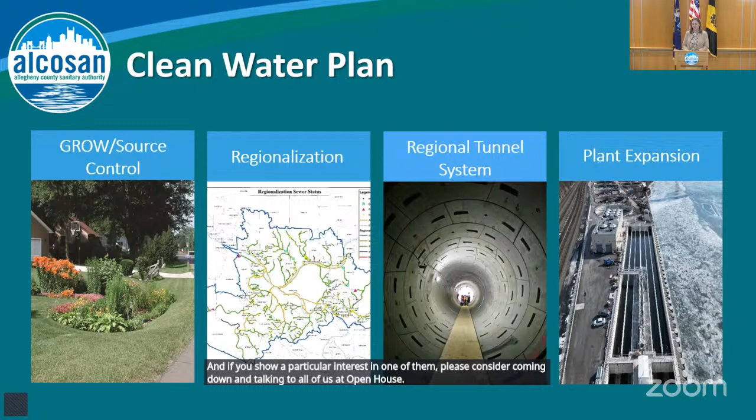Again, here are the 4 pillars of our Clean Water Plan. I hope you enjoyed the updates tonight. We're very proud of our work, and I hope that shows through our updates. If you show particular interest in one of them, please consider coming down and talking to all of us at the open house, and having the opportunity to spend a little more time digging into any of those details.

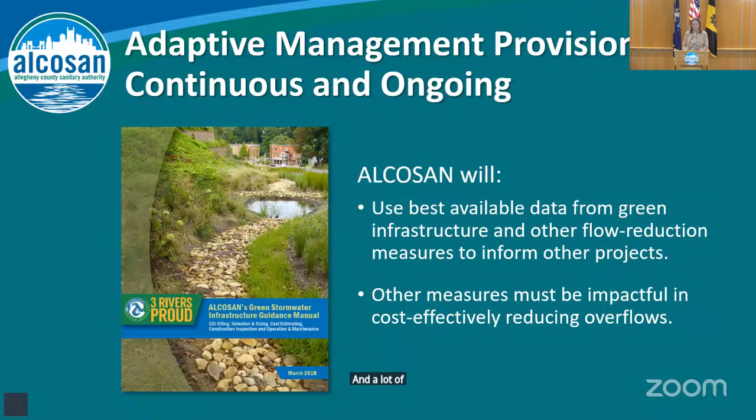So this is something that is in our consent decree, adaptive management, and it is using the best available data, the best available technology. These are long programs. Like Jeff said, that north end, construction started in August of 2020. We just put it online in January of 2025. These are long projects, things change. If there is something that comes up that can show equivalent or better performance, let's have a conversation about it. This is a very long program and a lot of things change and come up over the course of these many years while we're working on this stuff.